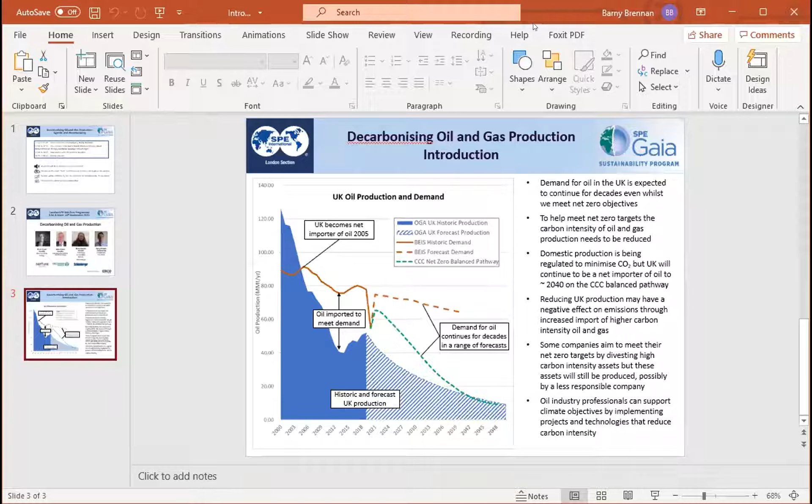Thanks very much, Barney. Can you hear me? Okay, I can hear you fine. Are you able to try sharing your screen? I will stop sharing.

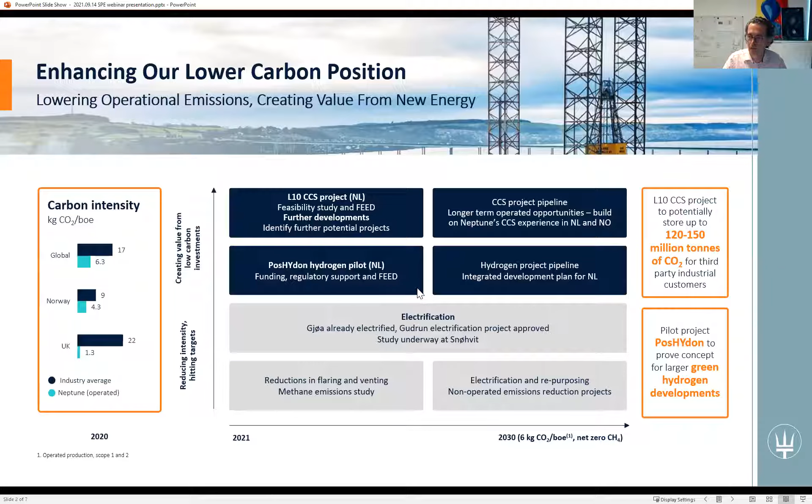So turning to these different key projects one by one. Why do CCS at L10? Well, it's quite sizable in terms of storage capacity, currently estimated at between 120 and 150 million tons of CO2. It's a very well known area in terms of subsurface, with about 50 wells that have been drilled over the years. It's an area that is well connected and not too far from shore, so we see that as a great opportunity.

One of the specificities is this dual-purpose reconfiguration of L10. Currently we're progressing the feasibility work, but importantly, Neptune and predecessor companies have injected CO2 in K12, one of the satellites of the L10 hub, for 14 years. During that time we were producing off-spec gas from one of the satellites, usually removing the CO2 before sending the gas onshore. Initially the CO2 was vented, and then it was fully re-injected into the K12 Bravo field. That's given us quite an interesting first-hand experience of handling CO2 injection in the Southern North Sea offshore environment.

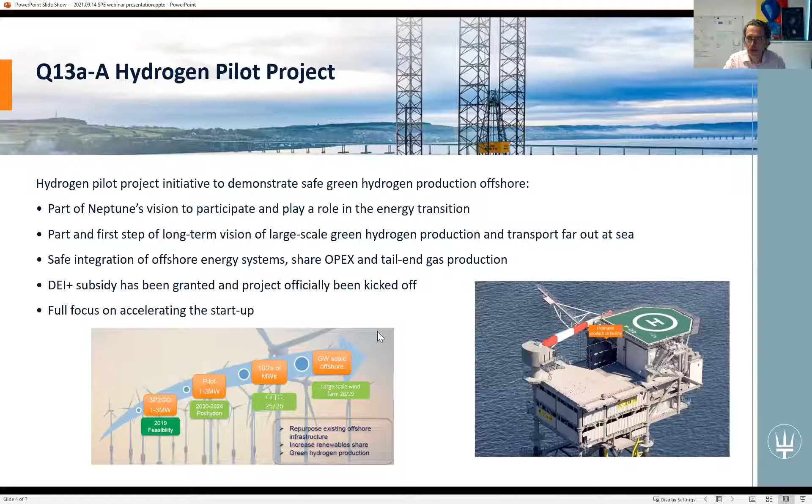Finally, another project we are involved in, which you might have read about, is the DelpHYnus project. This is a UK-based carbon storage project where we are aiming to at least initially produce blue hydrogen from the Theddlethorpe site, where the TGT Theddlethorpe gas terminal used to be. The blue hydrogen will obviously be associated with CO2 capture, and the CO2 is planned to be piped, repurposing the disused CMS pipeline, towards a forward deep closure in the Bunter formation, where you have a saline aquifer. Quite excited about this project, and it's quite important for the energy transition to facilitate low-cost transportation and storage of CO2, and to have a varied array of decarbonisation opportunities.

In the program here, there's a number of information around what we are doing, our experience in CO2 injection in the Dutch sector, the fact that with PosHYdon we are aiming to be the first offshore green hydrogen plant in an oil and gas environment, and some of the other key features.

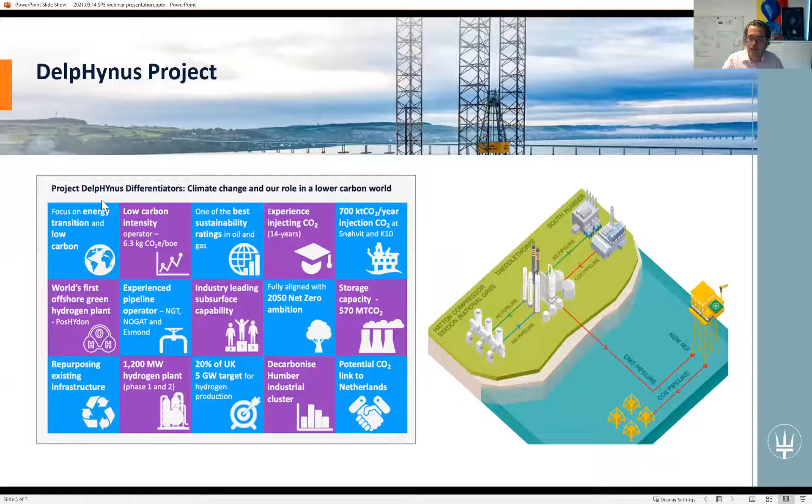So just to conclude, the key points: Neptune does believe that oil and gas is going to be required for the next 20-30 years, there's no doubt about it, and that in this journey towards net zero, there will be a requirement for new developments. Importantly, these new developments will ease the pressure on imports, because we believe that's the best way from a carbon footprint perspective to produce oil and gas - really to rely on locally produced hydrocarbon.

Decarbonisation can be facilitated by having access to green electricity, which is the case in Norway. It also helps, or is critical, to have a long life ahead of the asset so you can amortize the cost over a longer period of time. And finally, having clarity on CO2 pricing or CO2 taxes is extremely important.

You'll be aware that in Norway, the Norwegian government has made a recent announcement on their CO2 tax outlook, essentially rising to current value to over 200 euros per ton. That clearly sends a strong signal to the industry and also makes the economics of electrification or decarbonization much more attractive.

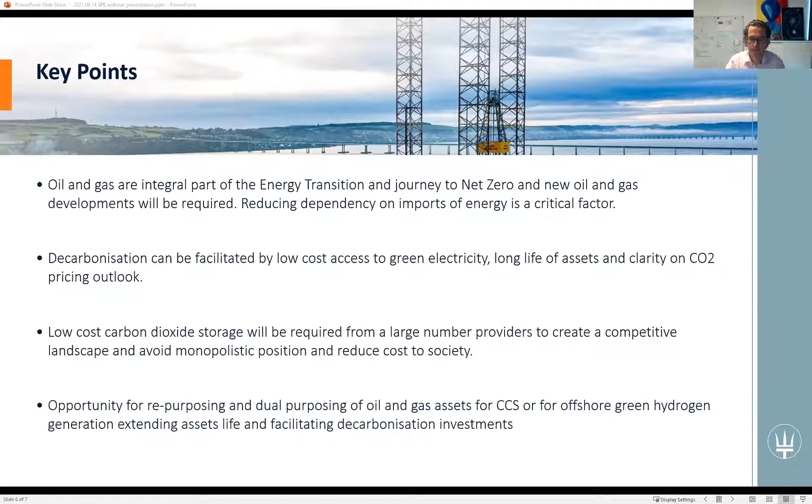Very good, Barney. With a little bit of luck, you should be able to see a screen with a beautiful sunset, a spare chat window, and a jack-up rig.

Not at the moment, Steve. We are seeing something with various contacts on there. Oh, right. Camille, are you able to provide any advice on this? Hi, Steve. So we are currently seeing your entire desktop. So what you want to do is share just the particular screen for your slides. Right, let me just... There we go, I think it's working now. Is that better? Yes, it is. Very good, okay, so apologies for that. Let me skip back a couple of slides, show you the sunset - I don't want you to miss that.

I'm CEO of Orcadian Energy, and really what I'm going to talk about here is how we, as Orcadian, a very small company looking to develop the Pilot field, responded to a challenge thrown out to us by the Oil and Gas Authority to significantly reduce emissions from our development scheme.

First of all, a little bit about the Pilot field. It was discovered in 1989. It's in the central North Sea, about 140 kilometers due east of Aberdeen. It's really well appraised. The basic characteristic of the field is it's got great rocks - 34% porosity, 95% net to gross, 2 to 10 Darcy's, a load of oil, 263 million barrels.

What's the problem, you're thinking? Well, the reason is the field - south of the field it's around about 160 centipoise, in the north around about 1200 centipoise, and that's what held back development for many years. But we've put together a polymer flood plan that actually recovers 79 million barrels from this field. That's 2P reserves, and that's based on a low salinity polymer flood.

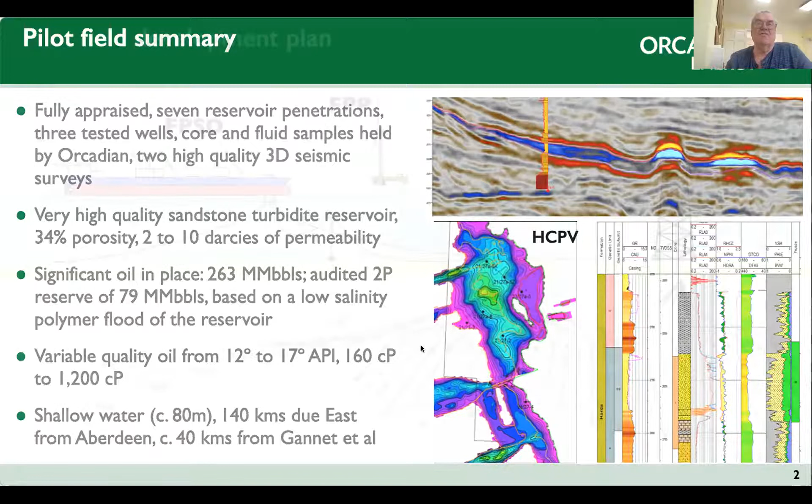So let me just show you what our development scheme looks like now. This is part of our response to the OGA. We're going to develop the field using an FPSO for most of the processing and actually power generation duties. We'll have a couple of wellhead platforms, each with 20 slots. We'll have a lot of wells - it's a very well-intensive approach we've taken, so there's 34 wells in this development scheme. They're spaced 100 to 150 meters apart. We'll actually have 2 wellhead platforms drilled from a jackup, and we will have a floating wind turbine to provide some of the power. That's actually part of the solution that we proposed to the OGA just in July.

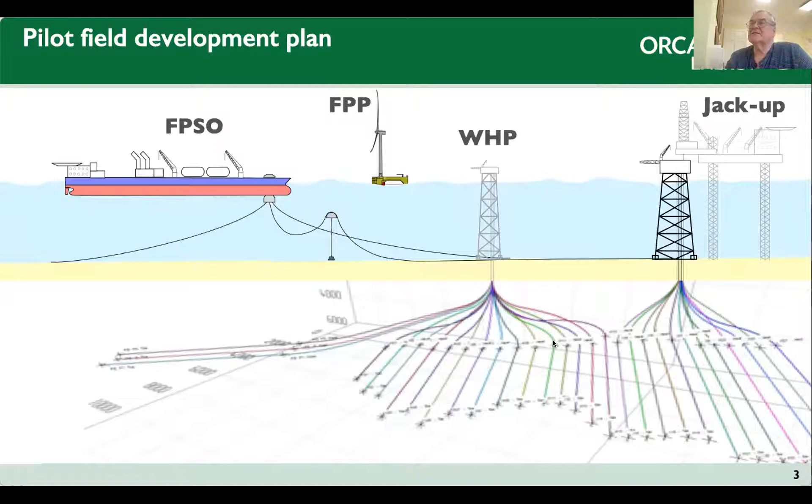This slide here really summarizes the whole story on CO2 emissions per barrel to be produced from Pilot. Let's start with a couple of benchmarks. So the first is, what is a typical viscous oil? What are the emissions associated with a typical viscous oil?

If you take the Kraken and Mariner developments and divide the CO2 emissions by the number of barrels produced, you get around 30 kilograms of CO2 per barrel. If you were to do a steam flood, you'd be up at 90 kilograms of CO2 per barrel. We did think we would like to do a steam flood pilot, but it turned out we actually made more money with polymer, so it was an easy decision to switch to polymer.

That 30 also compares to the North Sea average in 2018, which was 21 kilograms of CO2 per barrel. If we'd decided to do a water flood pilot, it would have been about 25 kilograms of CO2 per barrel produced. Adopting polymer flood shortens the field life, reduces fluid handling, reduces energy consumption, and compared to a typical viscous oil field, we've halved emissions, with emissions of 14.4 kilograms per barrel.

That was what we submitted to the Oil and Gas Authority in September 2020. I have to say, we thought we did a pretty good job - we'd reduced emissions compared to the North Sea average - but we were told, really, you've got to do better. What can you possibly do that's going to improve these emissions? And we want to look really hard at electrification.

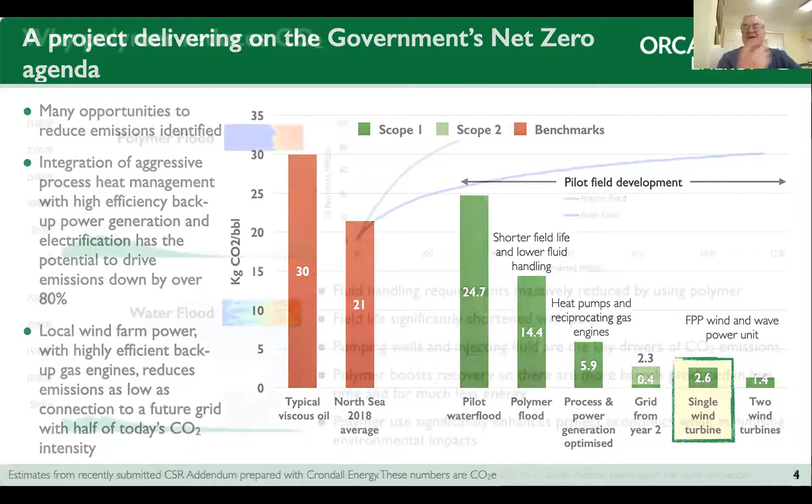So let's just focus in on how polymer flooding reduces CO2 emissions. I have a couple of production profiles here. Oil's in green, water's in blue, and the top one is a polymer flood, the bottom one is a water flood. I've got a couple of little core slabs as well.

These are core slabs with 2,000 centipoise oil in them. In the bottom one, it's being water flooded. That's after 2.7 pore volumes of water have been put through, and what you see is the water's just fingering through the oil - it leaves most of it behind. That's why with a water flood, you've got very high fluid handling requirements and your field life is very long.

Look at the polymer flood. What happens when you viscosify the water and put polymer into it is you start to stabilize that flood front, and you get a piston-like displacement of the oil out of the reservoir. You can see that happening in the production profile there for the polymer flood. You get faster, higher oil production, and much less fluid to handle - just 100,000 barrels a day fluid handling required for the polymer flood versus 250,000 barrels a day for the water flood.

I've actually taken those profiles and plotted them in a slightly different way - I've plotted the water injected versus the oil recovered. The blue line is how a water flood goes, and the green line is how a polymer flood goes. So you shorten the field life, you reduce the fluid handling requirements, you're using much less energy - that's the key driver of CO2 emissions.

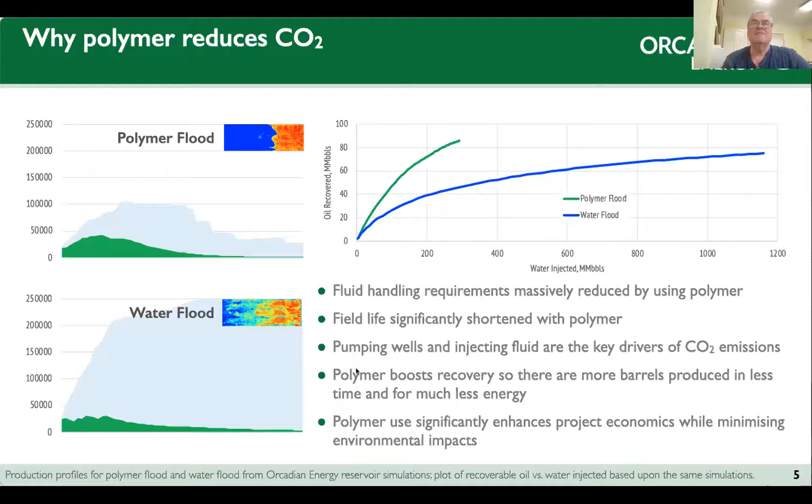So how did we get our emissions down further? Well, this set of charts explains how we calculated our emissions. I say we - what I actually mean is Crondall Energy and a very bright electrical engineer there called Joel Maisie, who did all this work for us. First of all, we quantified the power demand.

So the blue is for the FPSO, the pink is an assumption that we would electrify the jack-up rig and run that from our own electrical supplies. The dark and light greens are the power required for the downhole pumps, and the red is the export pump. So this is the total power demand.

It's knocking in 18 megawatts of power demand over the life of field. It's quite a short life, 11 years. And that translates into 8.53 kilograms of CO2 per barrel to generate all that electricity.

To that, we then had to add some process heat, because the separation system in this version of our development plan was electrostatics with very high process heat demands. Those two things together add up and made the 14.4 kilograms of CO2 per barrel.

We also keep track of those scope 3 emissions. So there's emissions for the supply boats, there's emissions for transporting the oil from the field to the refinery. But actually, we haven't started to address those. We've really just focused in on our scope 1 and scope 2 emissions, which in this case are 14.4 kilograms per barrel. So that was our base case.

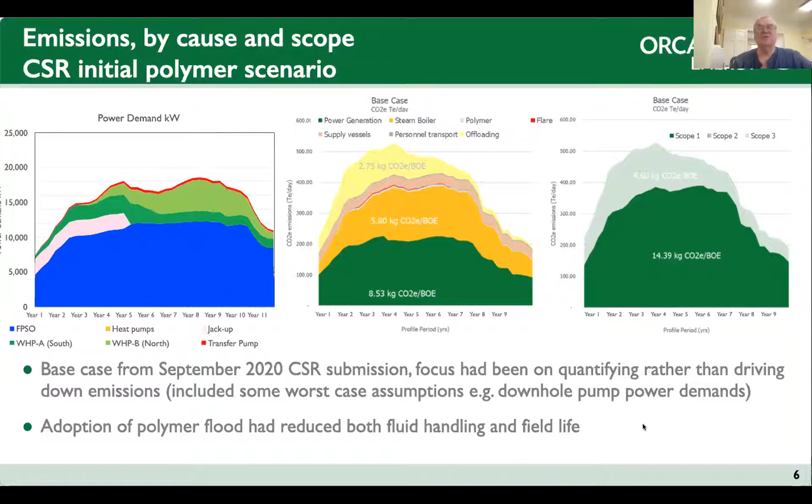That's where the OGA said, go and do something better. And here's a couple of examples of what we've done that's better.

We looked at our process heat demands, and one of the things we did is we adopted wash tank technology for oil separation. That's a lower temperature process, so that actually reduced the process heat demands.

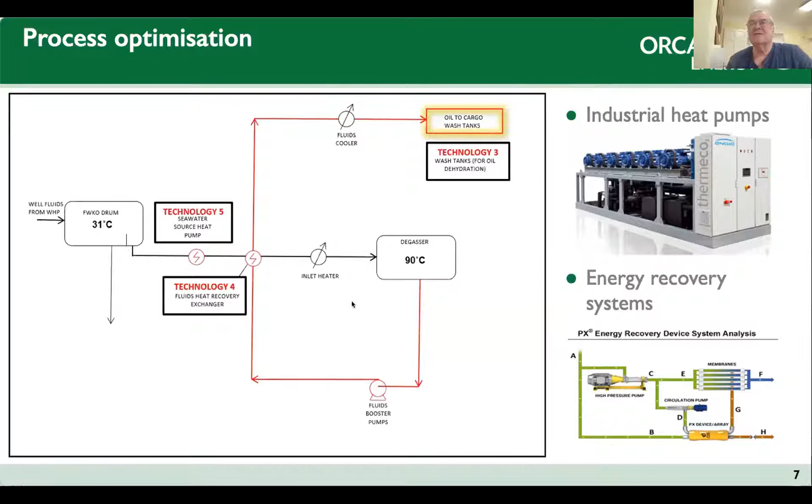But we also put in a heat pump. Now you hear a lot about heat pumps in the press, and they say you've got to spend 10 grand to put a heat pump in your garden. Well, we're spending $5 million to put an industrial heat pump into our process, and it really makes a positive difference. The next thing we did was we looked at our power generation systems.

If you look at a simple cycle gas turbine, you're talking about something that's in the low 30% efficiency. Combined cycle gas turbines have been designed to go offshore, they can get up towards 45, 46% efficiency, but they're big and complex.

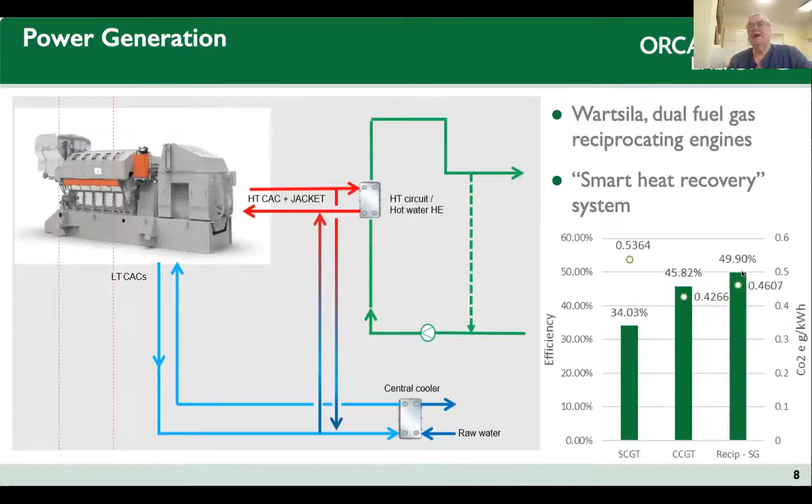What we've gone for are actually reciprocating gas engines, basically just big diesels, but tuned to run on gas and to have a smart heat recovery system. Those are almost 50% efficient.

You put those two things together, and we actually went away and focused on some of the power demand requirements on the downhole pumps as well. And we've introduced this demand for the heat pumps, and we've got our power demands down to 15 megawatts, which is just under 5 kilograms of CO2 per barrel, adding up to just under 6 kilograms in total.

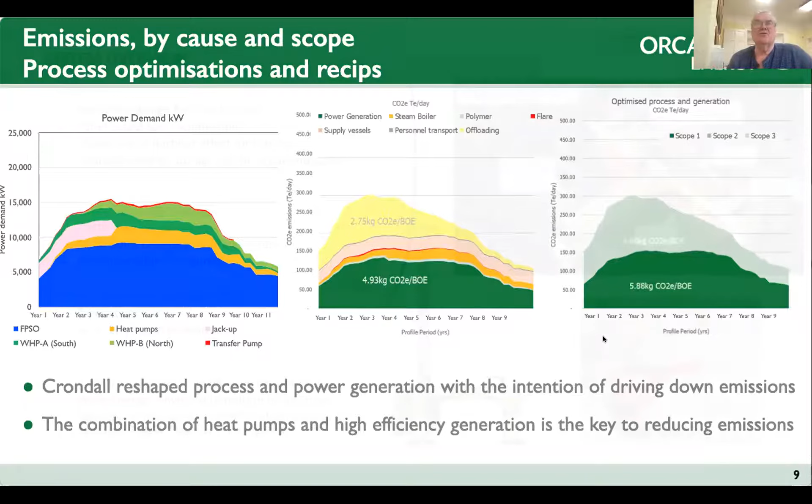So that halves the emissions again. And then we looked to work with a company called Floating Power Plant, who have a design for a floating wind and wave power generating system.

We're aiming to use a 12 megawatt wind turbine and 2 megawatts of wave power, and we add that into the process.

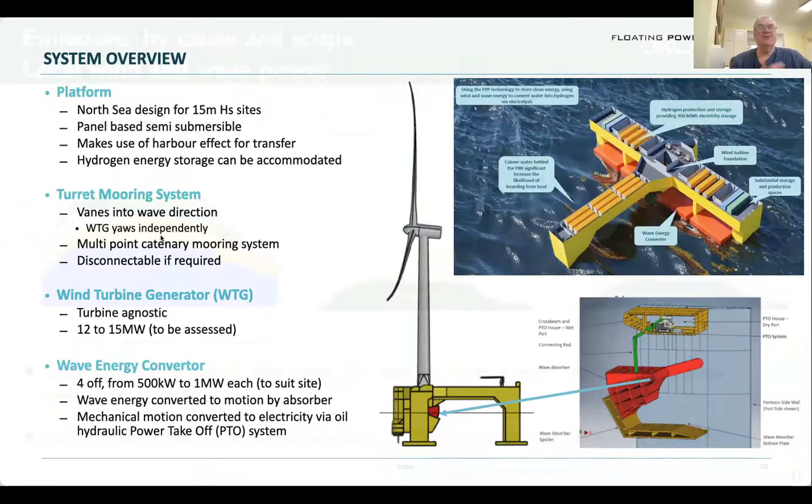What you notice is actually our power demand goes up a bit, because we have more heat pumps, because we have less waste heat, but our emissions are down to 2.6 kilograms of CO2 per barrel. And this is actually a very significant reduction compared to other oil developments, and especially heavy oil developments.

So we thought it would be useful to put our development in a global context. And I apologize, I'm about to switch units, from kilograms of CO2 per barrel of oil equivalent to grams of CO2 per megajoule. The reason we switch units is because we have a paper to compare ourselves against.

This is a paper published in Science in 2018 by Masnadi et al. It's a very big group of authors, but the core were based at Stanford University. They developed a tool to estimate emissions from oil and gas development projects and built up a data set which covered 80 million barrels of global oil production, roughly 80% of today's global oil supply.

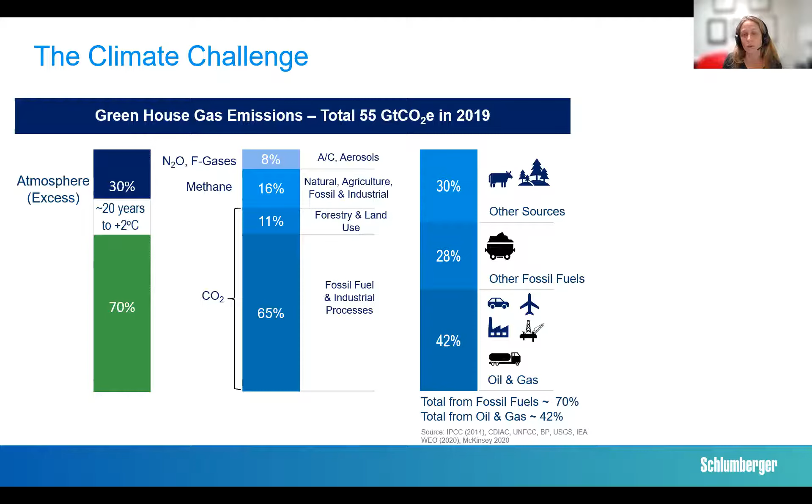Which means that if we look at the source of those greenhouse gas emissions, around 70% is from fossil fuels and an estimated 42% from oil and gas itself. So the impact of oil and gas from that 42%, and then the 10% of the industry itself, can't be underplayed. This is what we're looking at as far as decarbonisation and the importance of decarbonisation, within the context of the challenge of rapid decarbonisation and a reduction in greenhouse gas emissions of around 40% by 2030, and also a massive estimated growth in the world economy that's going to drive energy demand. So this is the context of what we're looking at as a problem, as I'm sure you know.

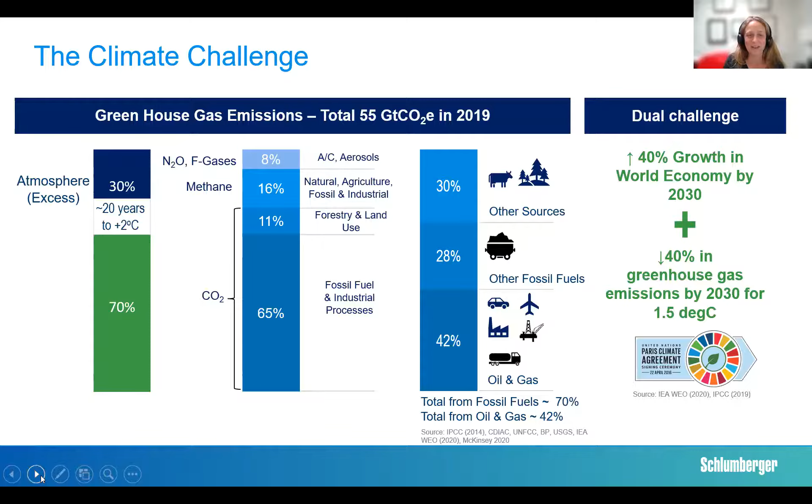Now, Steve threw around the concepts of scope 1, 2, and 3. So I've got a slide to show what those are and why they're important and the context they sit in for anyone that's not familiar. Scope 1 are called direct emissions, and they follow you around, if you like.

So these are the emissions associated with running your facility, as we mentioned, the rigs and production facilities, and any methane emissions, vented or fugitive, that occur at your facility are included in scope 1.

Scope 2, the indirect emissions, this is the electricity, the power that you buy that's generated somewhere else and transported in. Scope 3 is where it gets really interesting because these are emissions that are associated with or a consequence of the activities that you do, but don't sit within your own value chain.

So here, upstream, we can see, for example, purchased goods and services. And then downstream, we can see the use of sold products, for example. Now, this is important for both producers and suppliers like ourselves to understand that entire value chain and where the emissions are coming from.

And if we look at the industry itself, and that 42%, which translates to around 23 gigatons, you can see the bulk is the consumption, the use of the sold product, so the burning of that fossil fuel. But there's also a quite significant part, which is the industry itself in scope 1 and scope 2.

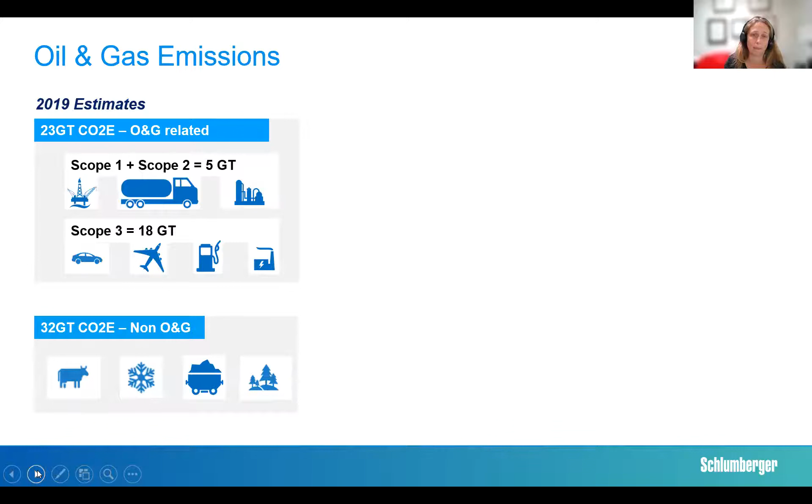And so if we're to look at decarbonising oil and gas, we can't ignore, for us, those scope 3 emissions. So how do we split out the industry emissions?

So we take out the usage of fossil fuels and we go back to that around 5 gigatons of the industry. As you can see, more than half is coming from methane, and the importance of methane, both vented and fugitive, on greenhouse gas emissions.

And this is because of what's called the global warming potential of methane. It's around 84 times that of CO2 over a 20-year period. And we can see that both in upstream and downstream.

Then you can see, as was mentioned earlier, the importance of heat and power to production facilities and extraction and drilling. And then we see the importance of flaring and of transportation.

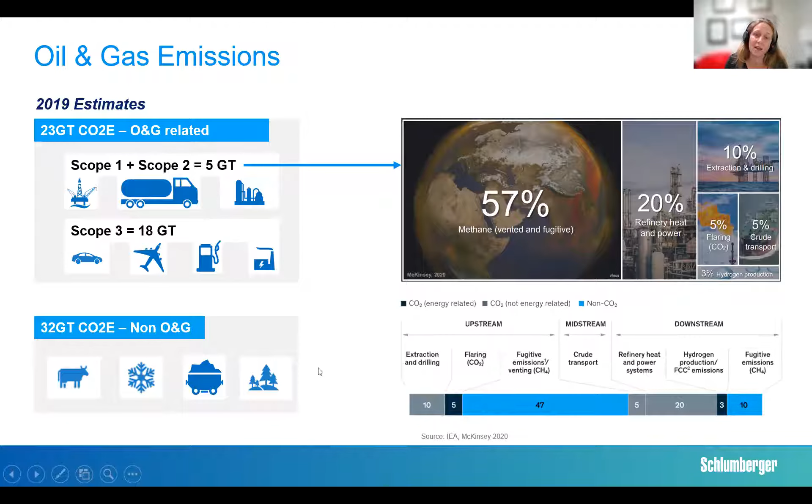So if we look at this, what it says is there are opportunities across the entire E&P cycle. We'll need multiple solutions of varying scales in order to be able to address all of the emissions involved in the industry.

Now, I'm going to take a little bit of a detour here with some slides that I borrowed from IPIECA. But this sits within a broader context of the United Nations Sustainable Development Goals, which cover social, environmental, and economic development for the world.

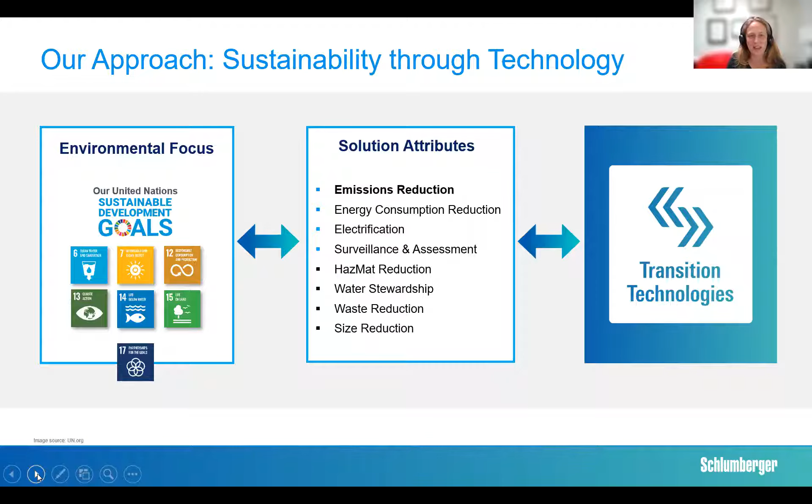Now, what we wanted to be able to do was describe technologies and show the benefit they would bring. And that required us to quantify. But in order to understand the data needed and the standards we needed to align to, we started with commercial technologies - ones we had more data on, where we understood the operational scenarios, the manufacturing, supply, etc. So we started with more than 100 technologies that were already commercial.

We looked at those 8 attributes and how each technology could deliver a reduced impact, then put together a framework for doing those quantifications across all the different technologies we have, from chemistry, surface pumps, downhole tools, to compressors - just everything that we have. We put that framework together, and I'm going to talk through that in a minute.

And as we go through these quantifications and qualify them, this is what we're starting to now show to the industry - those numbers and the quantifications that we've done.

So it's a complex arena. There are many standards, from the Greenhouse Gas Protocol, the ISO 14000 series, information on greenhouse gases from the IPCC, energy emissions from the IEA, many databases and companies providing information on materials, embodied carbon, energy emissions depending on the country and source of energy, and all different types of transport emissions, from supply vessels to airplanes to helicopters, from DEFRA, EPA and more. So there's a lot of data and a lot of standards.

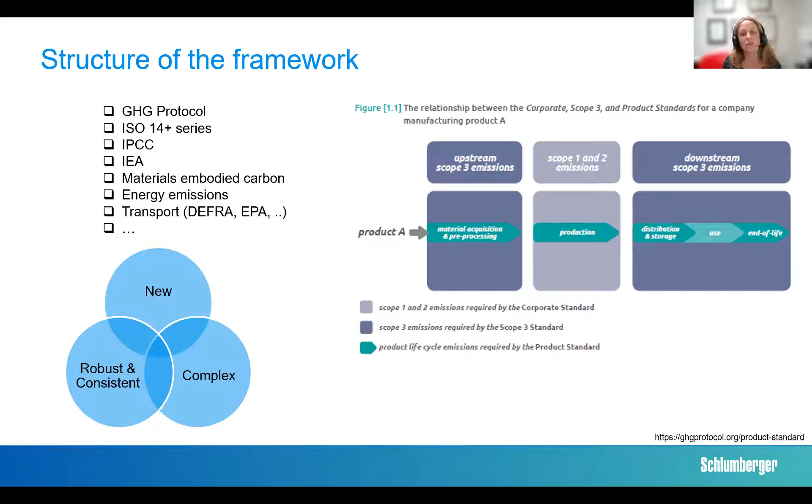Now, on the right-hand side, I've got a graphic straight out of the Greenhouse Gas Protocol product standard, where you can see we're looking at the life of a technology - from the initial purchase of materials, through the facility it might be manufactured in and production, onto distribution and usage, the downstream angle. Each technology will have a slightly different life map, and the different phases will also vary based on the type of technology.

So our framework starts with understanding the scope. What is the technology we are looking at, and how does it sit within an operational process? We define that scope and the boundary of the comparison and quantification we want to make, and what the reference technology or reference process would be.

We then look at the proposition - how does that technology provide a benefit? Are we looking at energy, emissions, or water? We see that technology tends to sit in one of three areas. It can have a direct efficiency - so one motor or one engine can operate in exactly the same facility, but with a higher efficiency.

We can look at an indirect, which is often a system-based quantification. So by switching out one technology for another, do I drive a wider system efficiency or reduce system energy consumption? The third one is elimination - am I changing a process or the way I do an activity, eliminating parts of those processes or activities themselves?

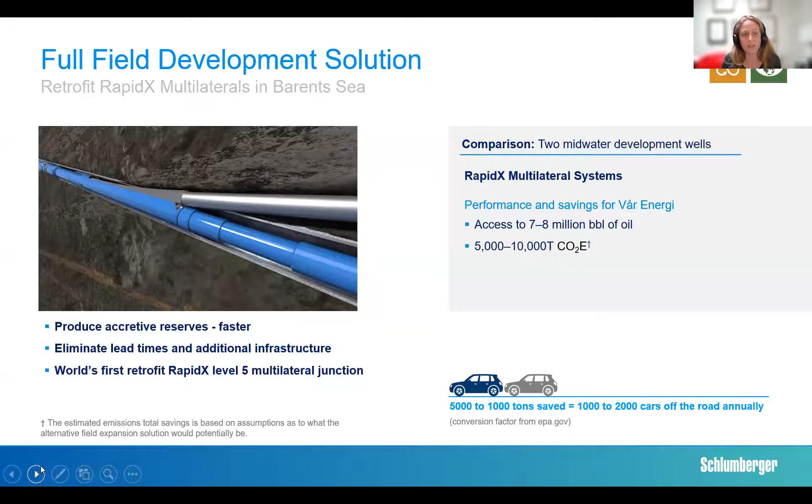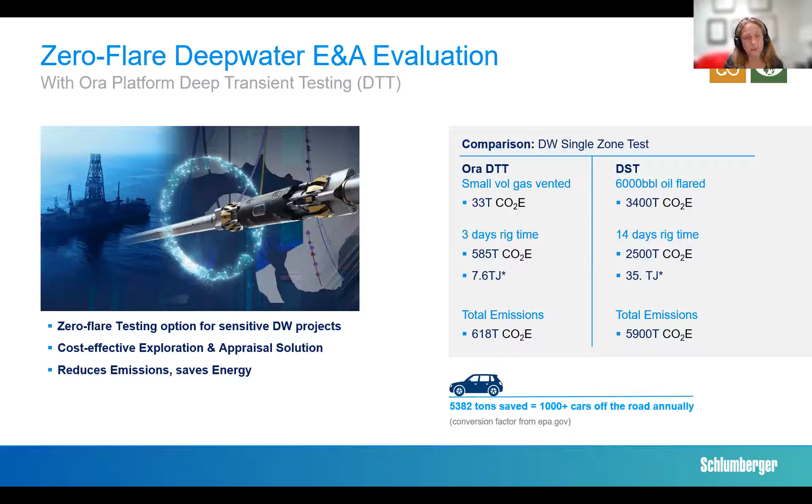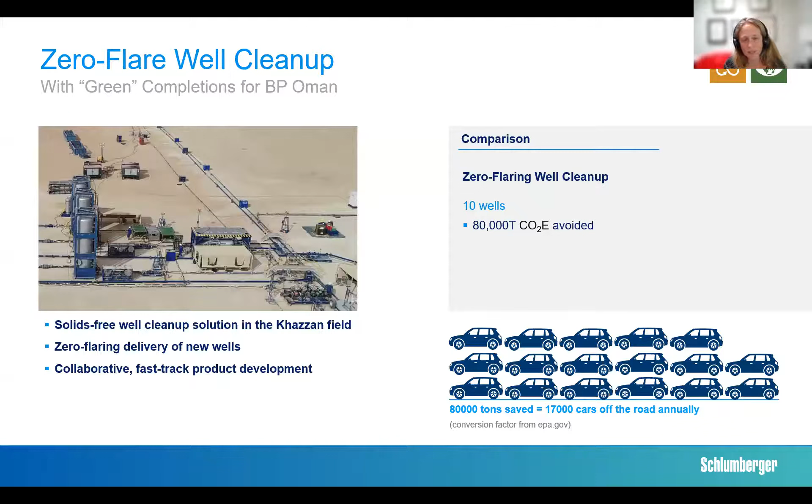The last example I have here is a design in of a zero flare. So over 10 wells over 1 year, by putting in a series of multi-phase pumps, feedback loops, and a separator, we managed to prevent around 80,000 tons of CO2e that would have previously been flared.

I think one thing that hopefully we can get onto in the discussion is I'm very focused on the technology design and the choice we use for the activities we do. But there are other areas around operations optimization, and from there, planning and design. Steve alluded to it as well - right from the get-go, if we have a conversation about what it is to achieve and how we can plan and design in a reduced footprint from the start, then our opportunities are greater for reducing footprint.

So that being said, I know it's been a bit of a speed run, but I look forward to the discussion now.